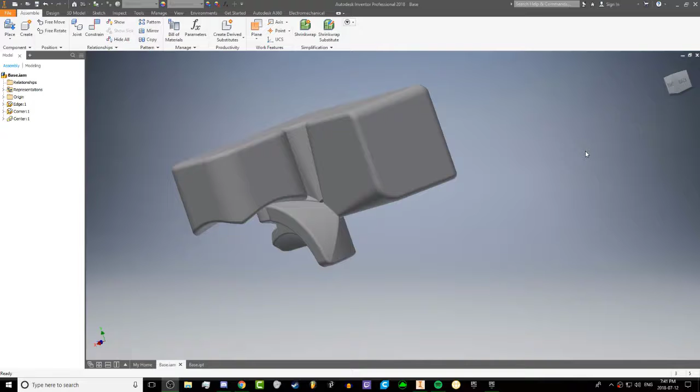It's been a bit since I was on vacation, but we're back now, and this is going to be probably the final episode of this particular tutorial series, where I'm going to show you how to print it, and a couple other optional things you can do if you want to do some more complex stuff with this base design.

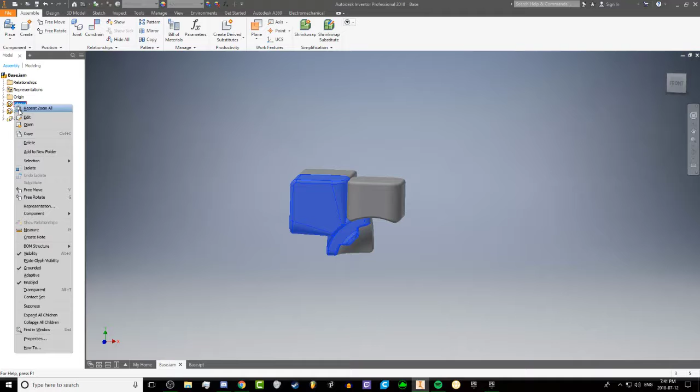So the first thing we're going to do is show you how to get these parts so that you can put them in the software that allows your printer to use them. Keep in mind I'm teaching this as if you're printing on an FDM printer. So we're just going to start with the edge piece.

How you get these prepared for printing is you go to File, Export CAD format. This is Inventor, but either way, whatever you're using, you need to export it as a step file. Normally I would use STL, but recently I've learned that if you use a step file and make changes to the main piece in Inventor later, you can still use it as something to mess around with, whereas an STL is useless - you can't do anything with it unless you put it in software like Blender.

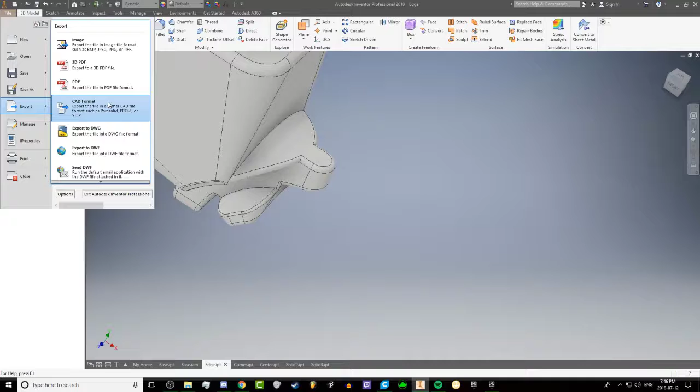Alright, so it turns out I was wrong about using step files. I just checked, and you can't actually use them in Cura. So instead of exporting a step as you just saw me do for the edge, use STL. Step is good as a backup, but you can't use it to print, at least not in this case. So just do the same thing, export everything as an STL. I'm not bothering with step because I'm probably not going to use this again unless it turns out surprisingly well. But otherwise probably not.

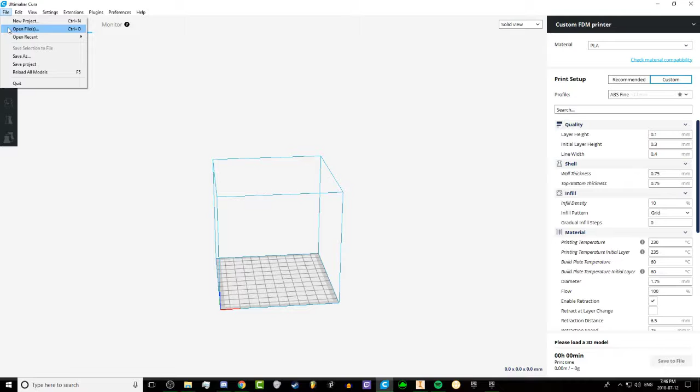And that's it, there we go. Now we have them all exported as STLs. Now we're going to go into Cura and open all of these. There, here's all the pieces - we have all the pieces loaded into Cura.

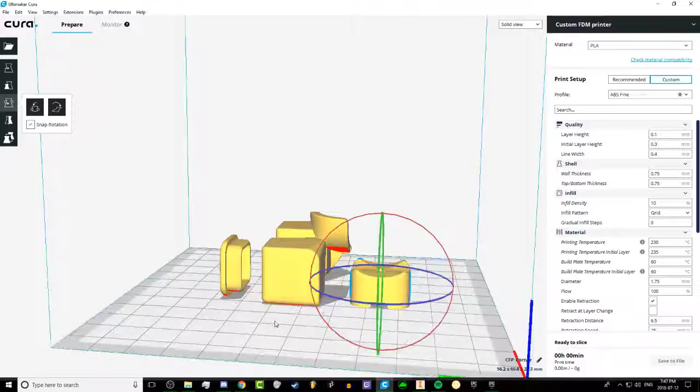And what you need to do now, this is the optimal way that I found to print these pieces for strength and for quality - you got to rotate this 90 degrees so that the turning surface is on top, and that will give that area the highest quality possible.

Same thing goes with the center cap - you want the area that goes into the center to have better quality so it actually fits properly. The edge should be fine just like that. There's nothing wrong with the default positioning for this.

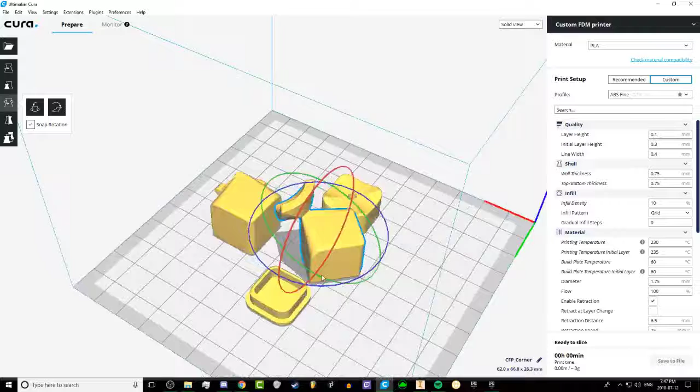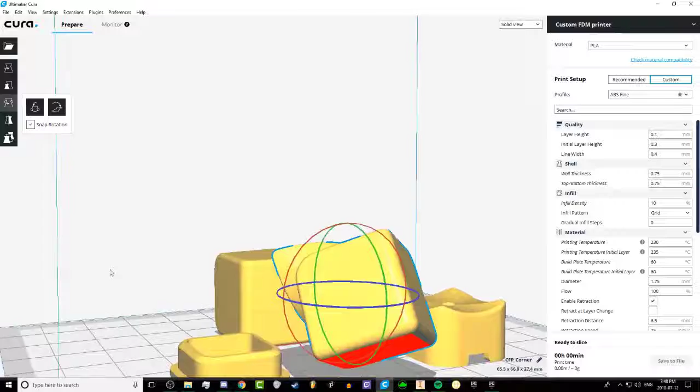And then for the corner, I turn it this way 45 degrees like so, and then this way 30 degrees. In this case it's hard to get it perfectly aligned, but basically this makes the connection point in this case perpendicular to the ground, and that makes it strongest. And then I'm just going to rotate it 180 so that the flat, longer side is closer to the ground, so that the supports work better.

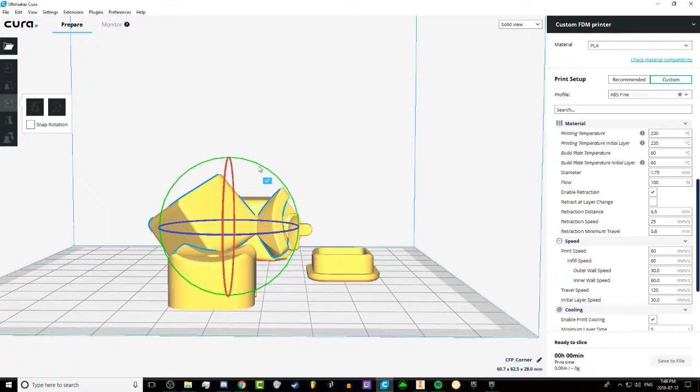I'm just going to go ahead and have it auto-arrange everything, and that should be good. Because I can see it's not quite perfect, I'm going to undo the snap rotation and lift this up a little bit. You don't have to do this - it should be fine if you don't, but I like to do it anyway just to be sure.

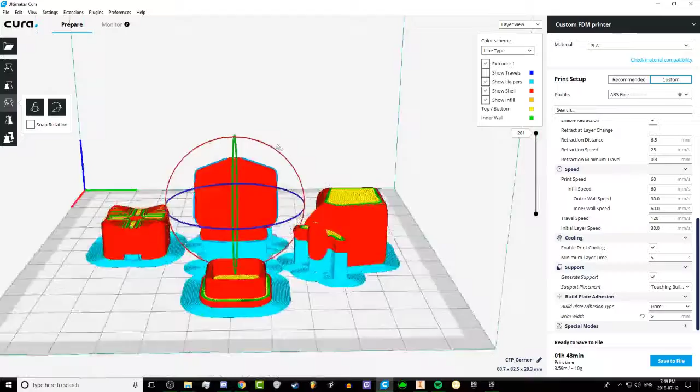Now I'm going to go ahead and change it to layer view. It's sometimes finicky with the slicing, so you can mess around with one of the settings and it should usually update. There we go. And make sure you have supports on and brim on to help the pieces stick.

So the final step is, however you do it - I use an SD card - you take these and save them. I'll save them into the folder where everything else is, and we're going to save them as a G-code file. CFP_test, or you can just save it as test.

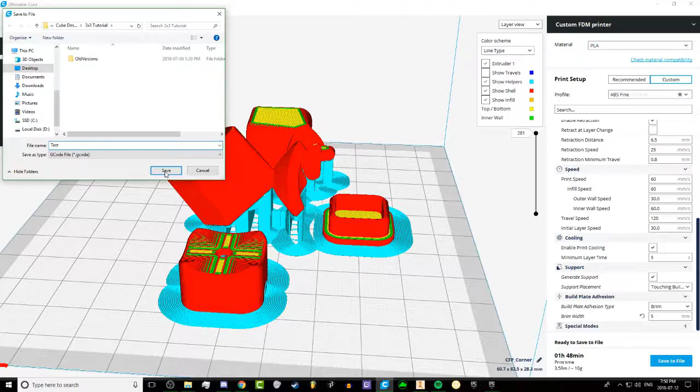You have to make sure - some printers can use STLs and things like that, but I use G-code with mine. You have to find out what your printer specifications are to do this correctly. And that's it - you just hit save, then put it in your printer, and you're ready to go.

So that's out of the way, and yes, I will make this cube later in the future, and I will upload a video on it to show you its performance.

So now I'm going to show you a couple things that you can do to help make your cube function a bit better, if you're willing to do a couple of things that are a bit more advanced.

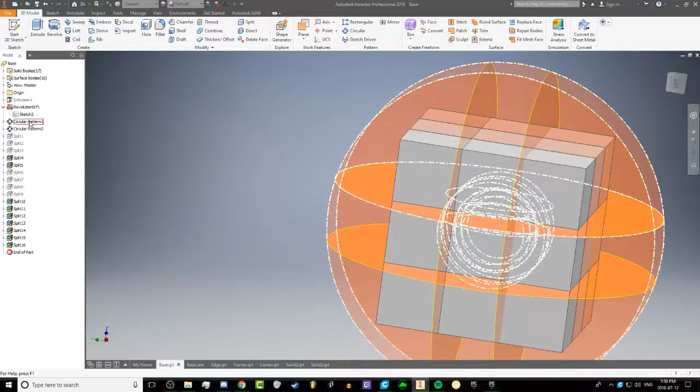So the first thing is you can go back to your initial solid. You can change this however you like, but I'm just not going to keep all the features that this creates. I'm just going to show you how to make a proper corner stalk, because the way this corner just comes to a point isn't very nice.

So what you want to do is get a center point arc and put it near the bottom, like that. Then just put a line going from here to this point. After that, trim this and make this 35 degrees. That will make the corner stalk perfectly straight.

Make sure that the arc is constrained to this, and then just say how tall you want that to be. So I'm going to say 2. Just keep it nice and small.

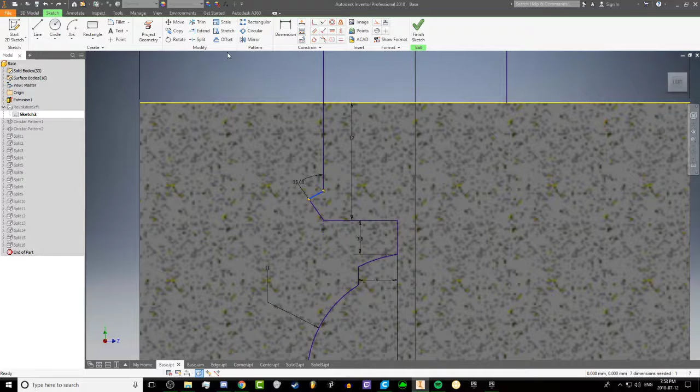Making sure that you keep this straight... oh, you can't do that. Just to make sure that things don't get misaligned, I'm going to make this here a work line, and then make sure that this is in line with that. Now I can only change that, which shouldn't even be possible because it's a center point arc. So I'm going to redo that like this.

There, it didn't meet. It should not be a work line. There we go. Okay, so can it move anywhere? No, but this can.

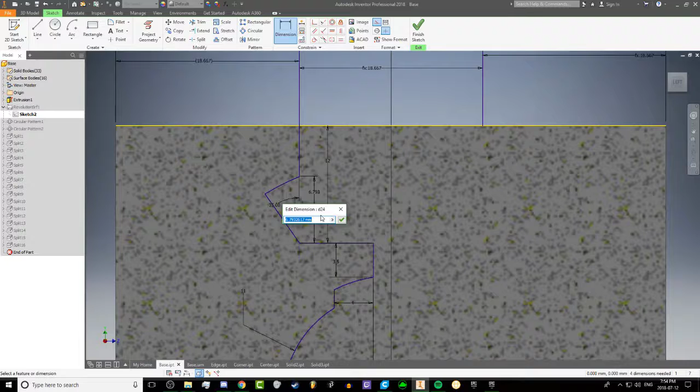Center point arcs in Inventor are finicky, so you always need to make sure that things are always constrained, otherwise you'll have problems. So that should be it for that. So we have the sketch done.

Obviously it's going to give us some lovely errors. This is not making a whole lot of sense, so I'm going to just fix all this. If you get these errors, don't worry, you can easily fix it by doing this.

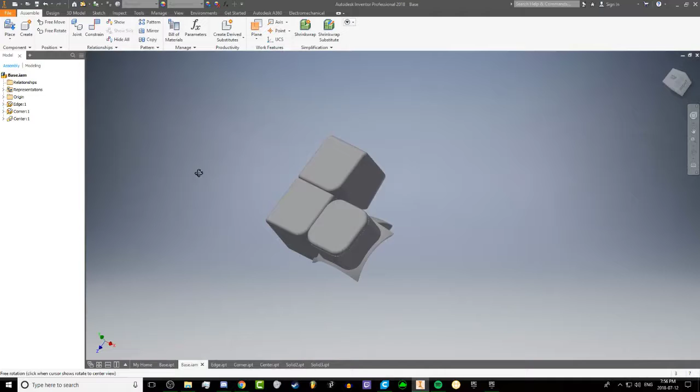Let's see if that broke everything or not. Oh, looks like we're good. Okay, awesome. So as you can see, after all that fixing, we now have a protrusion coming out of the centerpiece and a stalk from the corner, and the same deal with the edge.

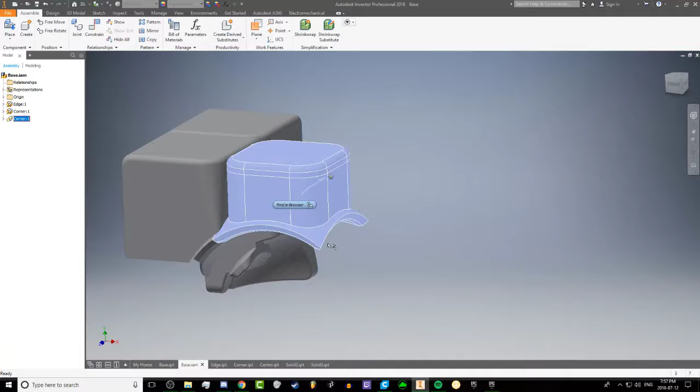Now, you don't actually need to keep this protrusion on the center or on the edge. So what I'm going to do is you can keep them and fillet them and all that. You would use a variable fillet on the centerpiece, and do a bunch of filleting on the edge as well. But in this case, I'm going to just get rid of it, and if you want to try that and figure it out yourself, go for it. In this tutorial, I'm not going to be showing you how to do that.

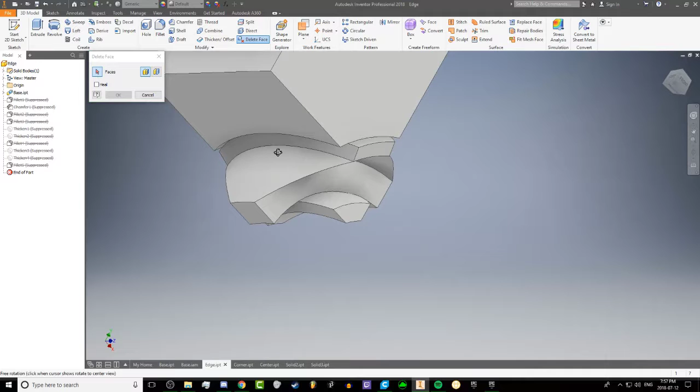So here's how you got to get rid of them. All you got to do is use delete face on these 4, check heal, and that'll just flatten that out. Then make a new plane by clicking these 3 points, like so. And then use replace face up here to take this face and replace it with that plane you just made. So now it'll be flat again.

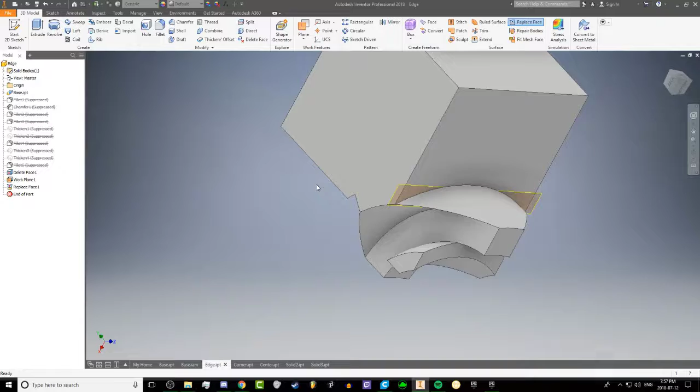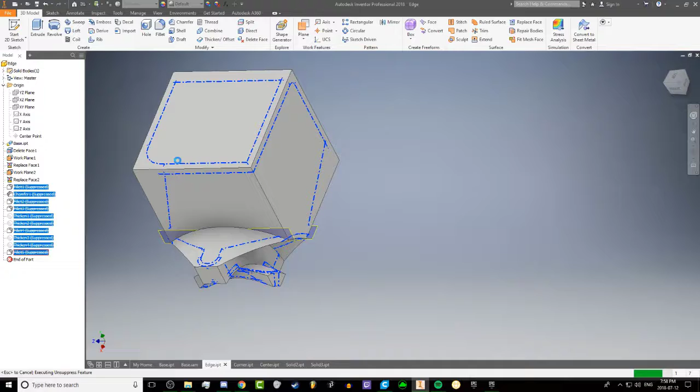And then what you need to do is do the exact same thing again. Here, here, and here. Replace face. Boom. Boom. And you're done. Then you just want to select all of these and move them above everything you did beforehand, and unsuppress them, as you saw I suppressed this stuff before. Then everything should work out just fine. There we go. I'm just going to make these work planes invisible because they look ugly.

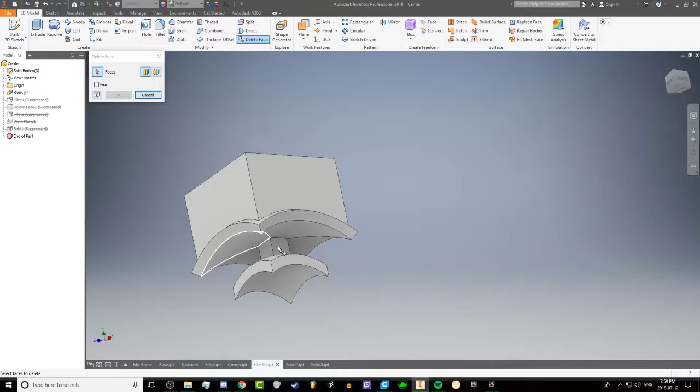And there we go, we have our edge done. Good. Next, we'll move on to the center and just get rid of this annoying ridge thing. So we're just going to go ahead and suppress everything. So we go on delete face, just select these 5 faces and check heal, and then just move it above everything else and unsuppress them. Once again, no issues.

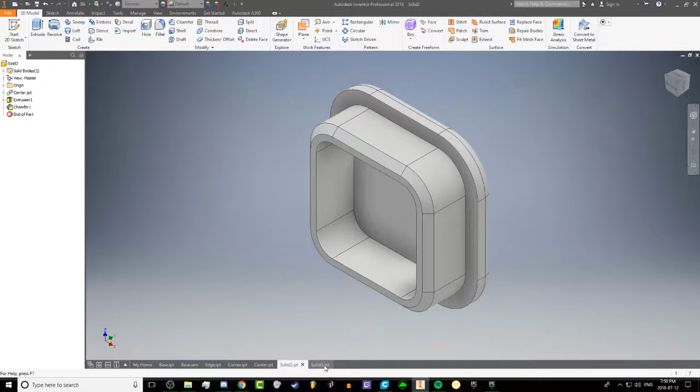Done. Just make sure everything else is up to date and save everything. Then we'll move on to the corner where it's just a little bit easier actually. So now we have our corner, and we have this stock here.

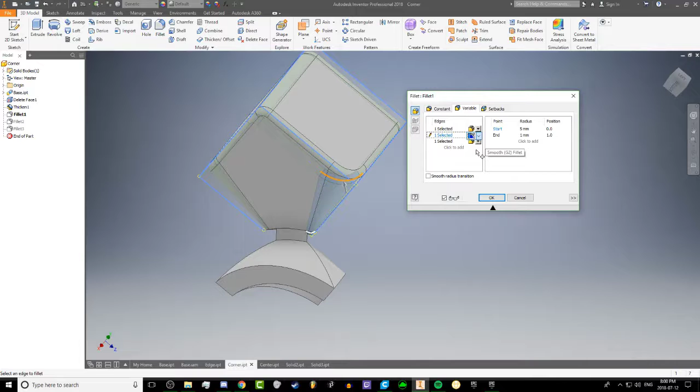Now apparently our first fillet has actually decided to stop working, so I'm just going to go ahead and add in that fillet that we did before again, and make it all G2 fillets, because apparently I forgot to do that last time. And there we go, so that's all good.

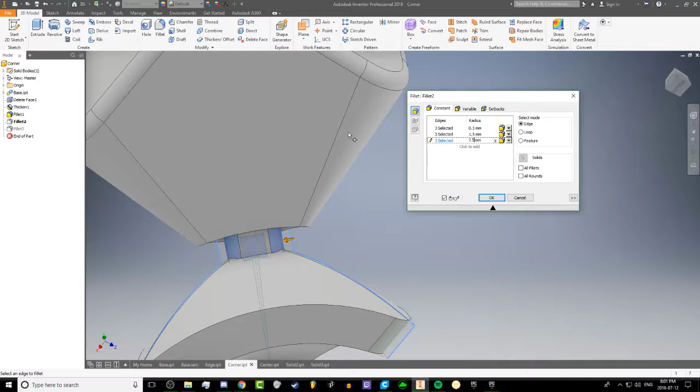Now what I'm just going to do is fillet the stock, go into fillet 2, and round it off quite nicely like this. There we go. Let's try rounding it by 1 millimeter. Okay, that's fairly round, but I'd like it to be a bit more so. That's nice. And we'll round this surface by, yeah, that's good, 1.5 millimeters looks nice. So there we go, we're just going to save that.

And then everything else is good. So that's it, that's all you need to do to make a corner stock. And then you can just go ahead and use this with everything else you already had done.

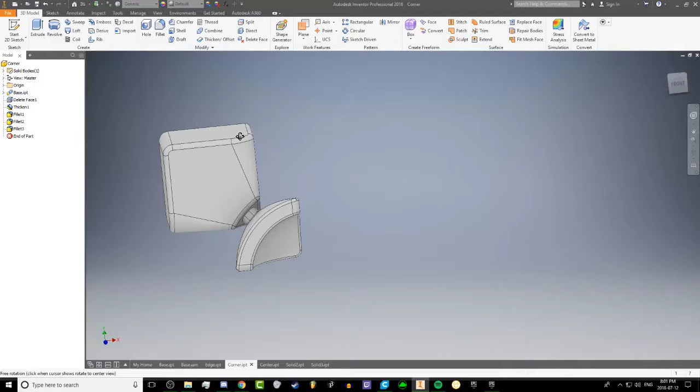For those of you who also did this part, you can just go ahead and replace your old corner, and that should be everything. You're now ready to print this 3x3. So yeah, go ahead and keep an eye out for that video where I test the cube.